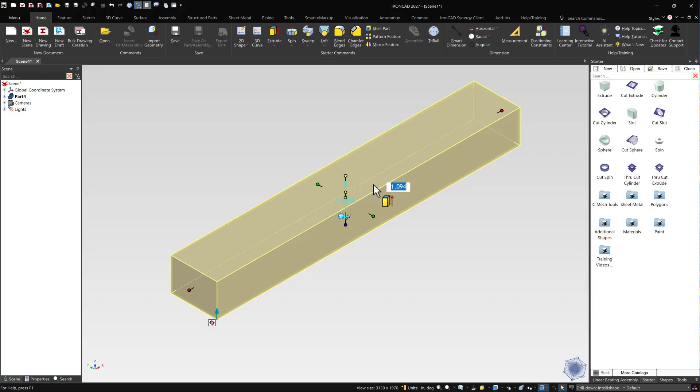To begin, we'll bring out an extrude block. We'll increase the length of this block to be 10 inches. We'll have the width to be 1.5 inches, and then we'll have the height to be a quarter of an inch, so 0.25.

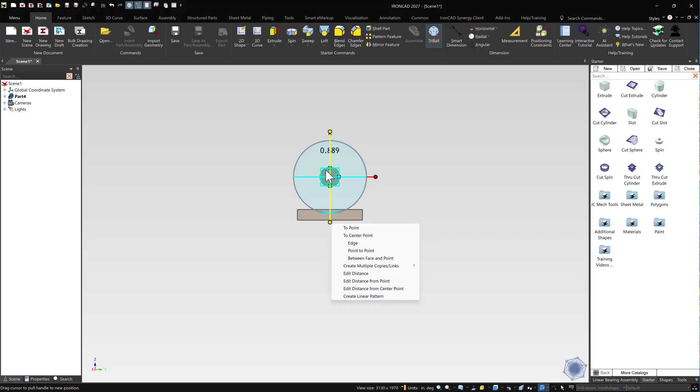Now we'll go to the right side. We'll add in a cylinder here. We'll bring this cylinder to 0.5 diameter. We'll open up the tri-ball, and from the center of this cylinder, from this bottom edge point, we'll have this to be 1 inch. We'll also bring this down fully, and we'll have this connect to this point here.

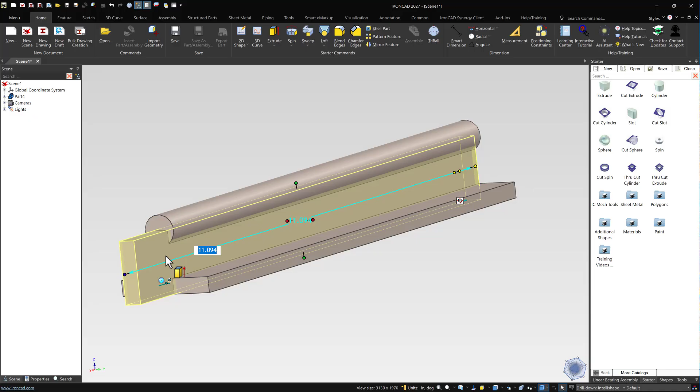Next we'll bring out another extrude block, and we'll bring this total thickness down to be about 0.26. We'll have this come down to this bottom point, and we'll have this meet in the middle here. Next we'll do similar - we'll bring this down here and have it do like this, so it'll all be connected in this way. It all should be centered as well.

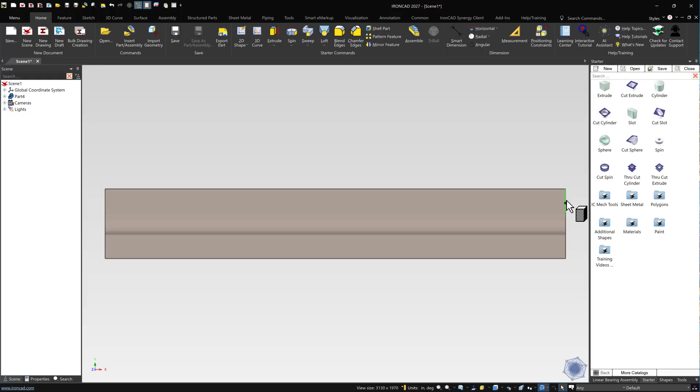What we'll do now is we'll come in and add our holes before we add in our chamfer edges. We'll come to the top view and we'll bring out a cut cylinder, which we'll bring to this point. These holes will need to be 0.22 inches in diameter, and starting from this face or edge, we'll bring this out to be 1 inch.

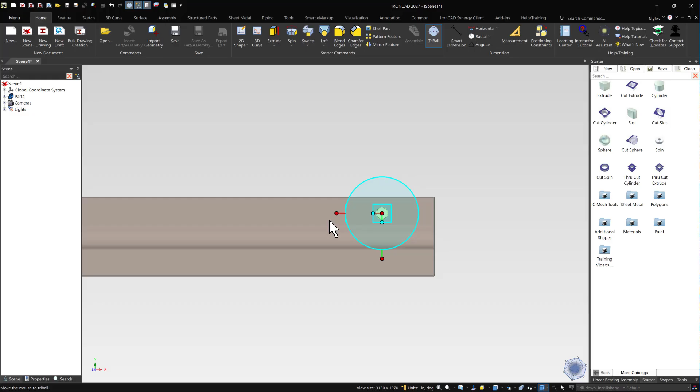What we'll do now is we'll have this go down 2 more times along this length. So we'll bring this out and right click and drag to be about 4 - we'll link it 4 inches. Then same thing, bring this out, but rather than having 4, we'll just double it and have it be 8.

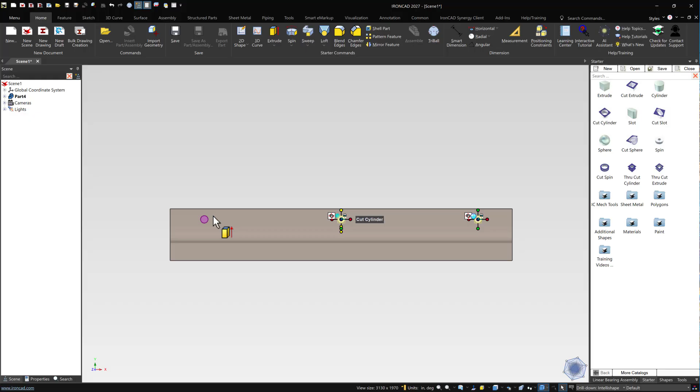So now I'll shift click on these, open up the tri-ball, and this will be mirrored on the other side. I'll bring it to the center here, click on this orientation handle, mirror, link. So then it'll be the exact same on both sides.

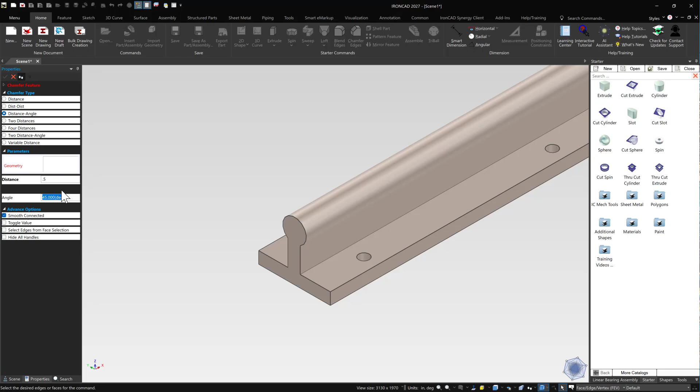So what we'll do now is we'll go to our chamfer tool. We'll change this chamfer distance to be 0.5 - actually, 0.25. There we go. 0.25, we'll have the angle to be 60. Okay, not 60, I believe it's to be 45.

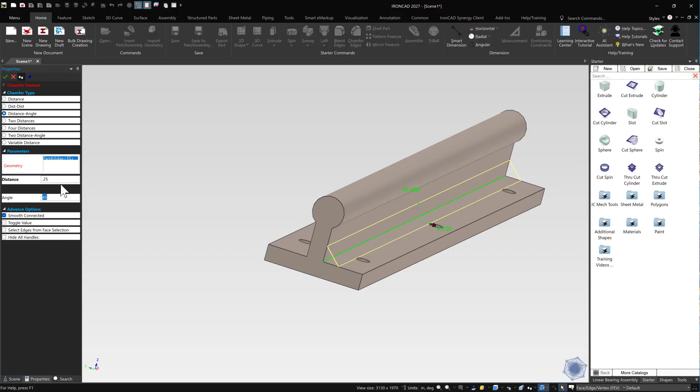Let me check. Okay, I see what the issue is. Really quickly, we'll actually come back here, and these holes here - they won't be centered on just this half. They actually need to be 0.25 from the end.

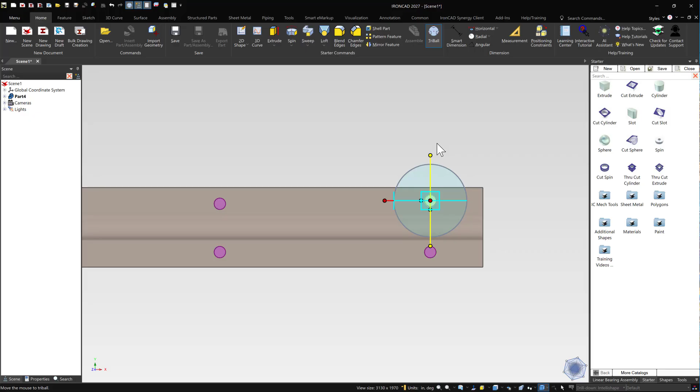So from this side here, yes, 0.25. All right, same thing for this side. We'll come back here and have these come to be 0.25 from the end as well.

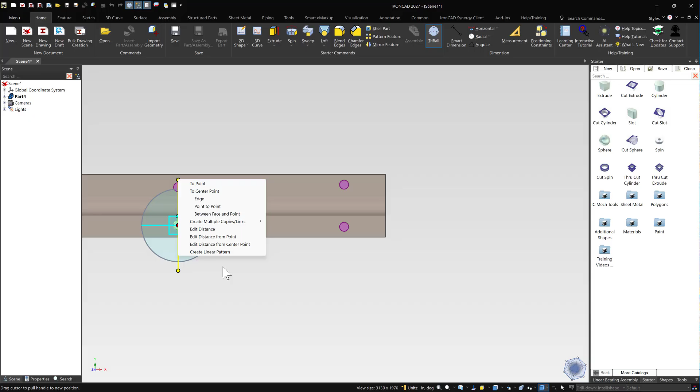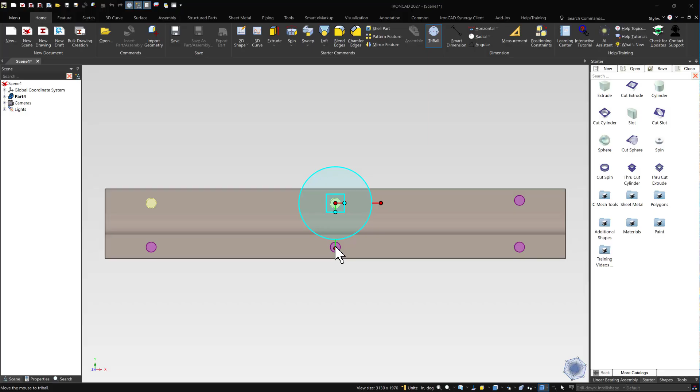There we are. I believe because they're linked, these should have also moved as well. So let me double check. They did not move, so let's do this - we'll come back in here and select these. What we'll do is we'll use the tri-ball and link them like this, to the center. All right, so now they should be lined up at 0.25 from this edge.

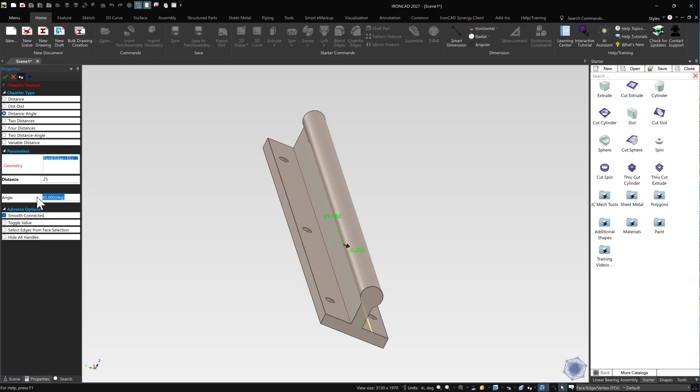So now what we'll do is we'll go back into the chamfer tool - chamfer distance, angle here, 0.25 at 60 degrees. And then 0.25 here at 60 degrees. I'm sorry, no, this is actually 45 degrees. There we are. Click OK.

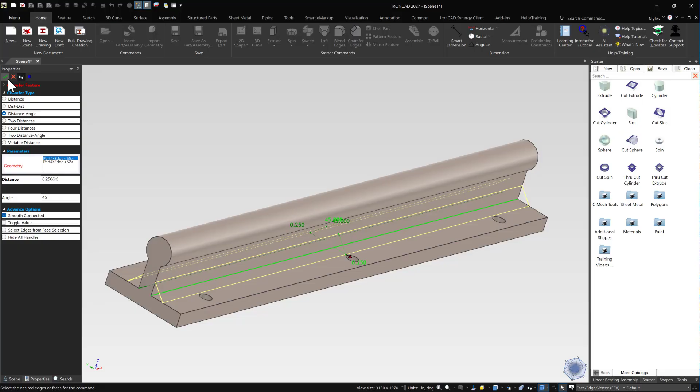And here we are, this is our guide shaft. So what we'll do now is we'll go into our materials, and we'll have this to be 6061 aluminum.

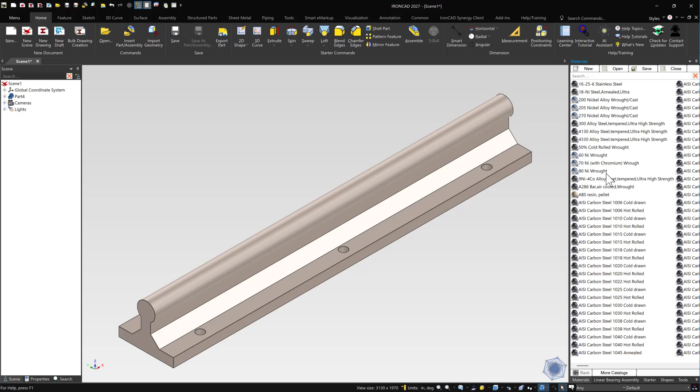It's not a... let's go back here to the front. Let's see - carbon, aluminum. Oh, there we go, 6061 aluminum. There we are.

All right, and so now we'll come down to our linear bearing assembly. Make sure to name it guide shaft, and we'll drag this into our catalog. For safekeeping as well, we'll save it as guide shaft, already into linear bearing. Click OK, and this is our linear bearing.